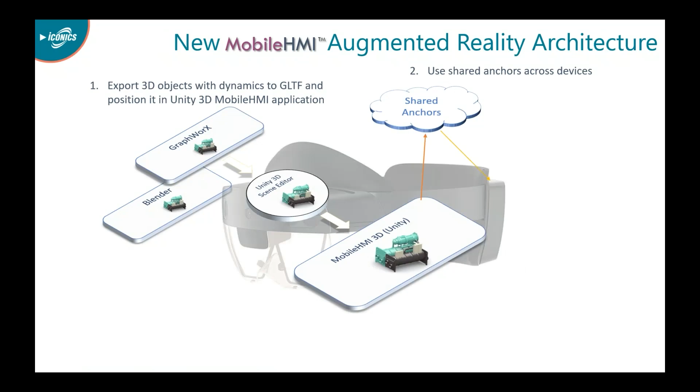This is a little description and drill down about what we just talked about. We have our objects with dynamics as a specific standard format, which is compatible with Unity 3D, and mobile HMI, which is compliant with this technology as well.

We can use this shared across multiple different devices. We can blend this into a single object, and then we can deliver this object and this result to many different types of devices, including holograms available on smart glasses like Microsoft HoloLens, or other types of tablet devices.

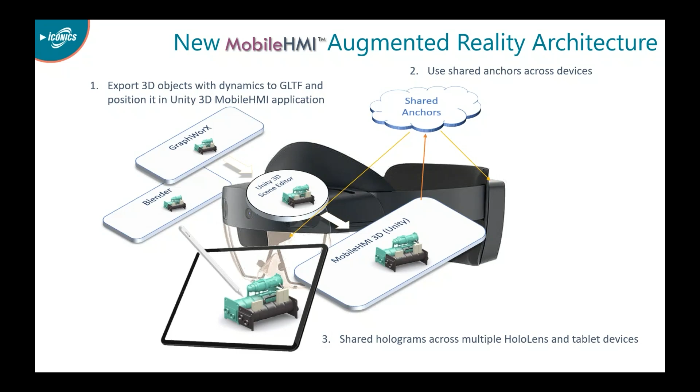Okay, thank you, Roberto. And let me make myself presenter. I will show my screen.

You should be able to see a screen with the AirServer application. This application is very nice - it allows me to project what I have on my iPad. I'm rotating the iPad to show you it's a live projection. I'm using an iPad because many augmented reality features work well with these devices. This is what we want to show today.

First, I will start this application on the iPad - you see that on the screen. We call this application Mobile HMI, and you can download it from the Apple Store. The application allows you to connect to the visualizations stored on the server. At the bottom corner, there's a list of servers you can add using the plus sign. If you're okay with the default server, you can just press connect. By the way, the application is fully responsive, so it works the same way on mobiles as well.

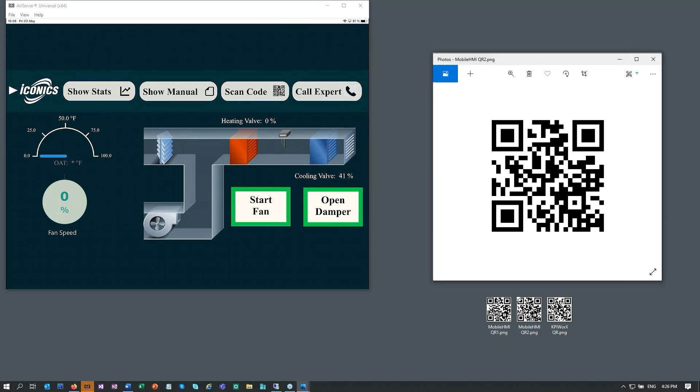With that, I would switch to the next application. This next application does a very similar thing, but again from the QR code - we call this application KPIWorX. You have a choice to download this application from the Android store or Apple store for typical devices, or you can run it directly in the browser.

Again, you have the server here to which you can connect, and on the iPad I'm going to press the connect button, which starts KPIWorX on the tablet. You can see it on the screen - I can rotate it again, it's fully responsive. KPIWorX is a self-service dashboard.

It allows me to, for example, select one of these signals and bring them onto the screen. And if I want some visual look to that, I can select one of these gauges. There was a presentation where KPIWorX was explained quite deeply, so I would suggest taking a look at the recorded webinars we've done previously.

What I want to show in this session is that I can either use the menu again to switch to other displays like this one, or I can use the button in the corner and scan a QR code again. I will open a QR code on my screen - you can see it already - and press the scan QR code button, which gets me the camera again. I will go slowly, so when the whole QR code is in view, KPIWorX downloads the related dashboard.

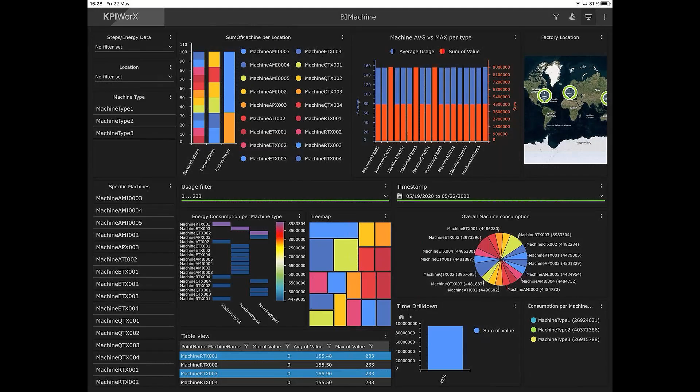Let me make the application smaller again, and I will show you where you configure that stuff. I will switch to my configuration environment, which we call Workbench. Workbench allows us to configure basically everything we have in GENESIS64. We can configure the assets in the AssetWorX database, data connectivity, alarms, historical data, and of course also the augmented reality, which is in the mobile HMI.

And we have a possibility to define the layouts we have seen previously. At the bottom we have the actual augmented reality actions, and we can bind them to the commands. So very quickly, here we have the possibilities.

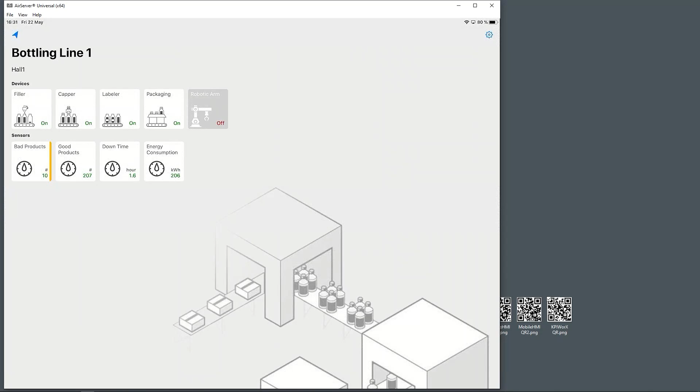There is another application which we have for the devices. We call that, so far, native application for devices, smart native app. This app is written natively for smartphones and tablets. Again, it's fully responsive - I could rotate that.

What we are looking at here is some assets coming from the AssetWorX database for the bottling line. We can interact with these icons by pressing them. You can see the filler - I can turn it on or off. I will do that so you see the change on the screen, or I can modify the labeler, the third icon.

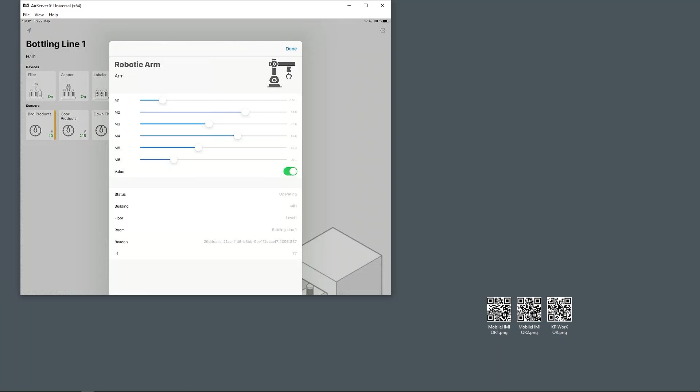And here for the robotic arm, we had a demo at the last SPS in Nuremberg show. We will probably repeat that again, so you are welcome to visit us there. This was for the robotic arm, and with a long tap we can get to a screen with sliders where we could modify the rotations of the robot arms. There was a real robot serving beers, and we were using that.

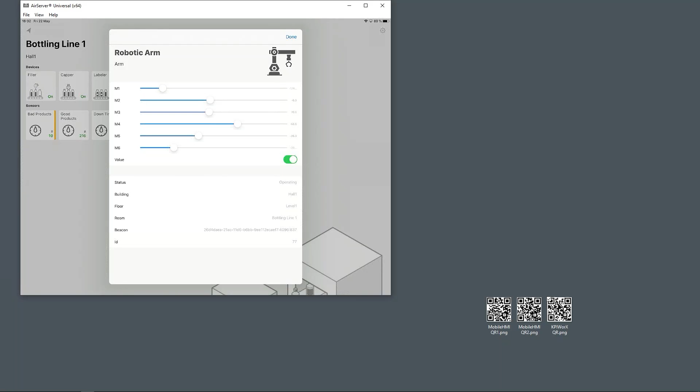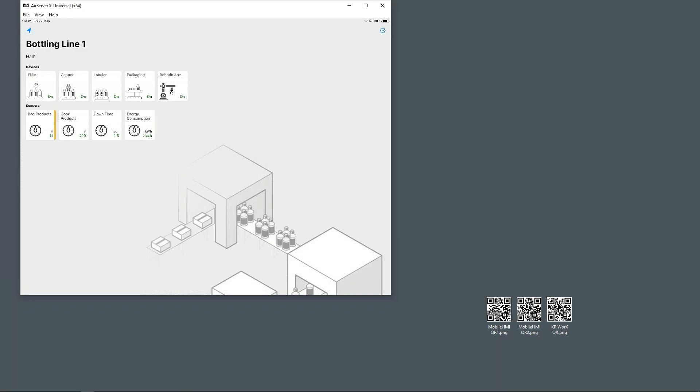So why am I showing this application? Besides being a very easy way to show the assets - all you have to do is define the AssetWorX structure in that Workbench configurator and select the icons, and that's it - the icons can appear automatically. What is important is that these assets representing the real stuff are assigned to a beacon.

A beacon is a Bluetooth technology which is used for finding locations. By assigning the assets on the screen to a particular beacon, we are able to get these assets on the screen. This app currently runs in simulated mode, because with the headset it's not that easy to run around the building and go from room to room for other assets.

So I will just simulate that. What I can do is turn off the automated locking, which is a code that looks for the nearest beacon. And I can simulate selecting some other beacons around me - for example, this one - and now I have switched to a meeting room. We can take a look at that.

We can rotate the screen again, and perhaps switch to another beacon, maybe the small meeting room. You can see it's a fully responsive app - it works very quickly, very fast on smartphones, iPhones as well. We can adapt this application for Android devices too - it's the general technology which allows that.

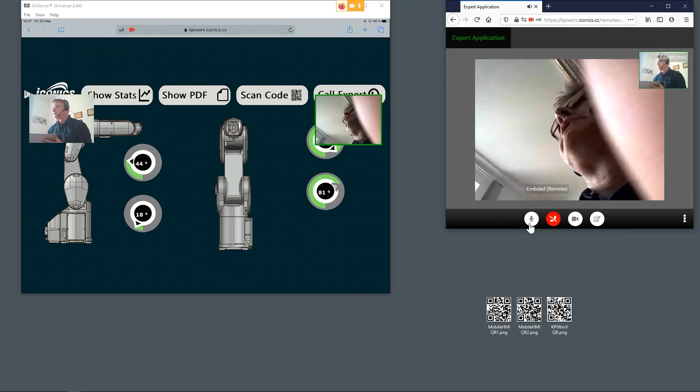In the same way, I will enable the camera on my iPad. And you can see me actually because we already turned on the expert camera. So hello, everybody. I'm going to enable it on my iPad. Now you can see it. I will enable the camera as well, and I will turn off the sound.

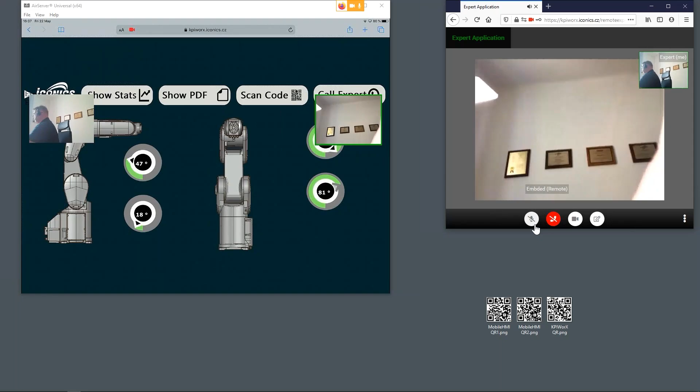Because this application allows connecting the expert and the worker both with video and with voice. For a second, you probably heard a mixing sound because I am now playing both the expert and the worker. So I have used the camera of the iPad looking at a device I have on the screen. I could move this device around—it's a real view we have.

What the expert can do in his application is freeze the view at any time he decides to, so they can talk about the equipment and do annotation on top of that. The default option is to do some selection. We are currently using the Wago device we are looking at. And by pressing this green button, I have just sent the annotation to the other side.

Now the technician with the iPad sees the changes on his screen, and he can discuss with the expert what's the problem and interactively find out what's wrong. There are other drawing techniques—I could probably select this piece here and explain to the worker that he should probably switch that one, and I can use text here to send him something like 'hello,' for example. Maybe switch to drawing and show something to check on this part of the equipment.

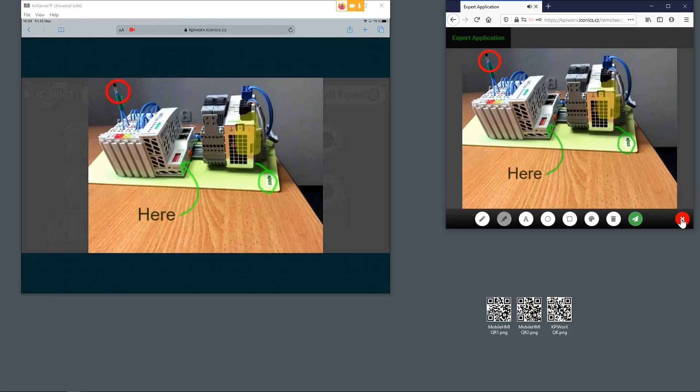So you get an idea. We have this simple user interface for selecting colors and the things you can do with that. It's very easy. When you do not want to be in this annotation mode, you press this button. When you want to hang up the call completely, you just press the red button on the screen in the browser application, and this hangs up the call.

Okay, so I can grab back my iPad. This was the remote expert feature. We are shipping that with connected field worker, but it is also available in the mobile HMI. It's available on the RealWear device as well. So even if you have a device which is operated completely by voice commands, you can use that with the remote expert feature. And I will switch to my last demo here.

And for this one, I can switch this app to full screen.

So now you can see it's still the iPad, it still rotates. And we will start on our augmented reality application. It's created in the Unity engine. You can see the application is showing a building here.

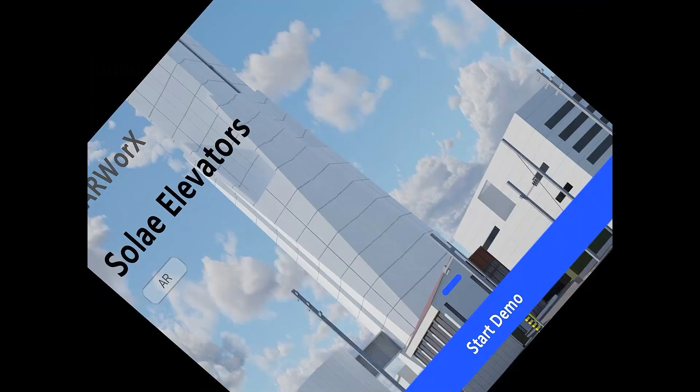Let me start the demo, and I will start with the 3D view. So what we are looking at is a 3D model, which we prepared in 3D software. I think we used Blender here, and we imported that into Unity. We are able to connect that with Genesis data, and we are able to interact with this model.

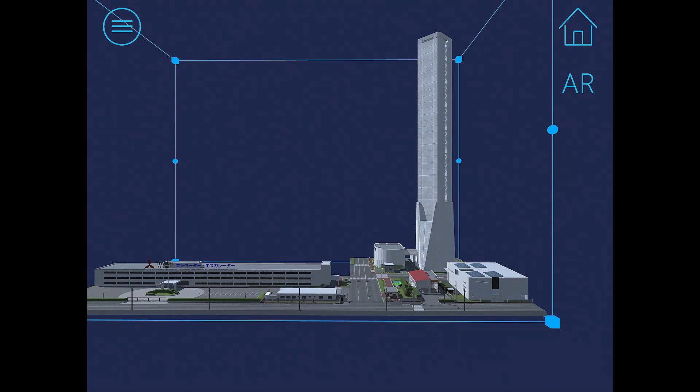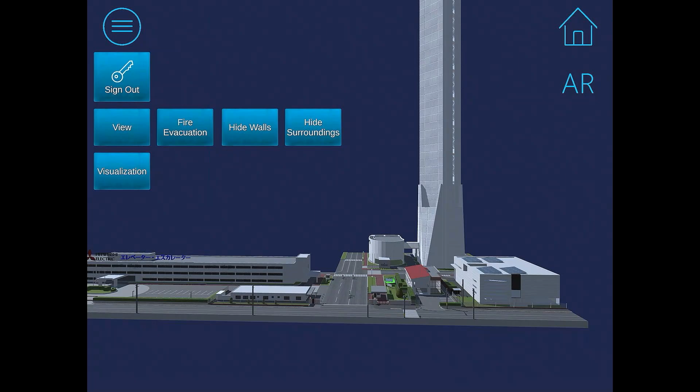I can zoom it, I can do the rotation on the screen and make it a little bigger. I can also interact with the model. So I can say I would like to see maybe the evacuation plan, and it can show me how many floors there are, what is the number of people or percentage of occupation, down to zero. This is something we are preparing as the demo.

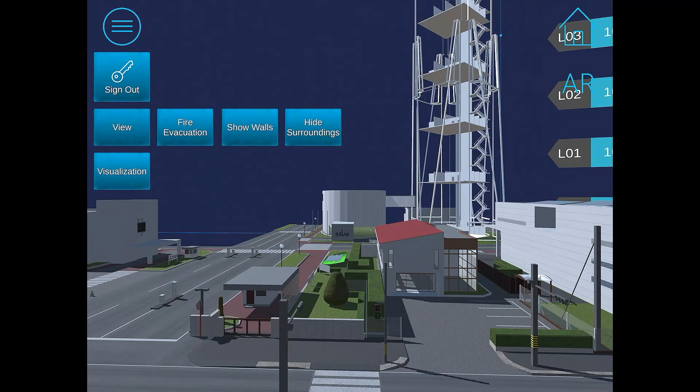We can also do other interactions, like hiding walls from the building and taking a closer look. We can even take out the whole surroundings. So this is one way to view the stuff on the screen.

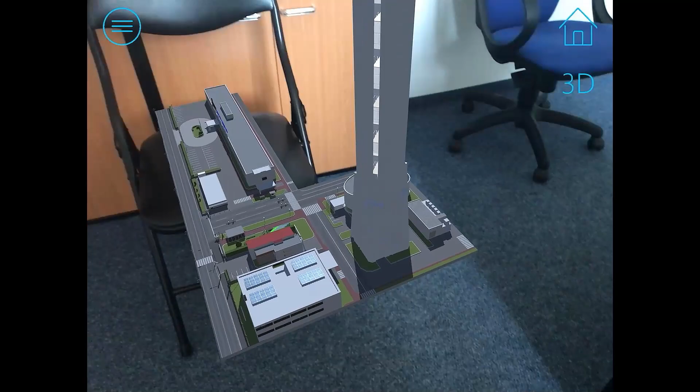And the other one is to switch to augmented reality mode. In that case, we actually get the model in front of us, and we can place it somewhere in the room, so I just put it on this chair. What is possible now is I go around with my iPad, and I can see a different view of the building, like you are really there. So let's look from the top at this tall building.

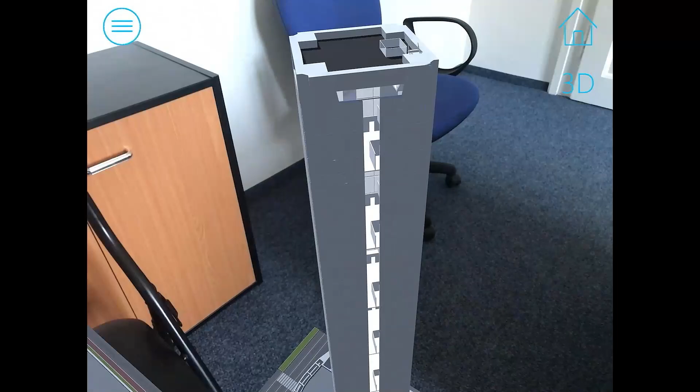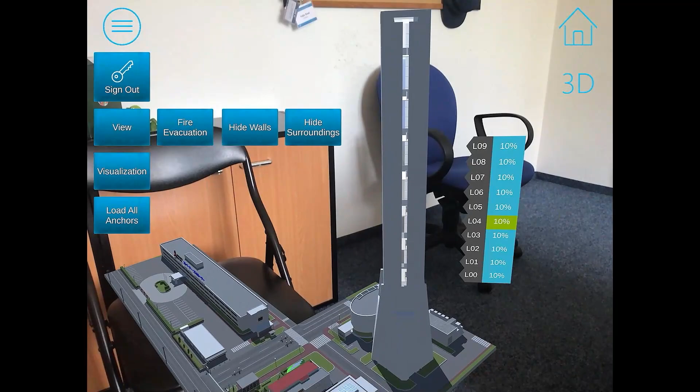This is, by the way, the Mitsubishi elevator testing building. They created this one just to test their elevators there. Very nice. Again, I am able to interact with this building, so I can say my view and the fire evacuation plan, and perhaps hide the walls, and we can take a closer look at how the building looks inside. So that was a quick introduction to the new app we will come with in the next version.

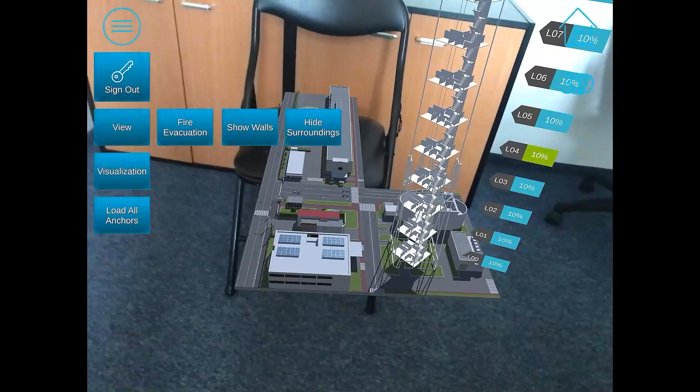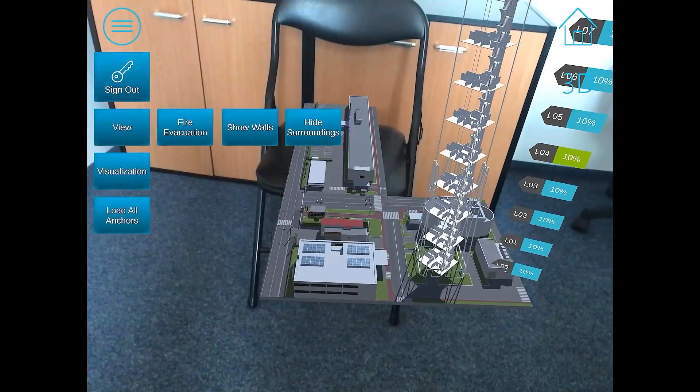If you need super fast 3D with augmented reality features, with 3D features which should work on iPads, phones, iPhones, Android devices, and also Microsoft HoloLens and HoloLens 2, this is the fastest way. But you can also bring to these devices our standard desktop visualization, as I have shown you in the previous demos.